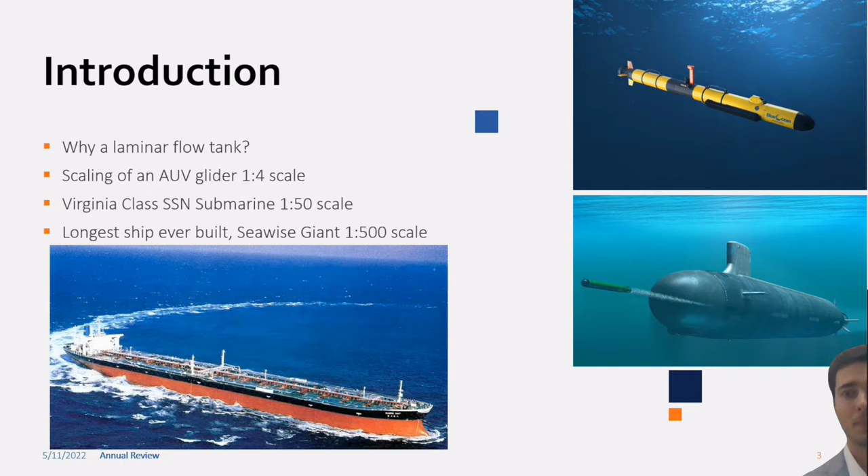So next we'll go over the calculations used, and some of the calculations I used were similitude, Reynolds number, entrance length, the flow rate, some head losses, and the power needed for the pump.

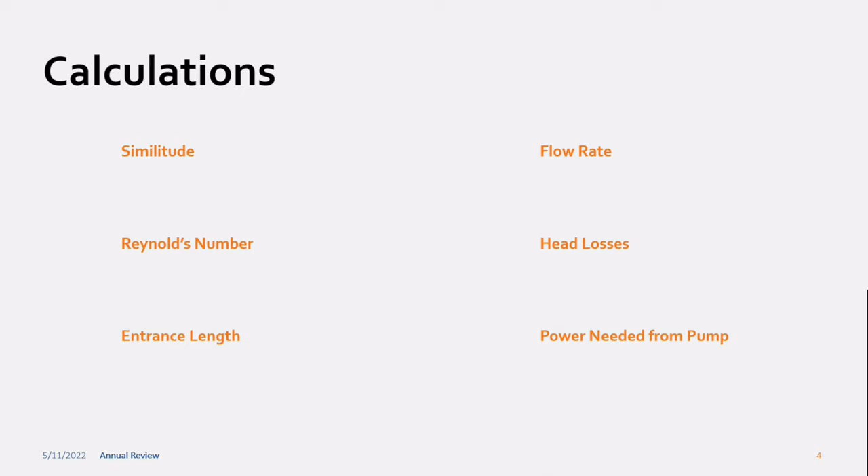So the first equation that I used was similitude, and a little background on similitude is the relationship between a prototype, which would be your real world object, and your model, which is your scaled object. So you can use similitude with dimensionless parameters, and these parameters can be things like Reynolds number, the Froude number, your drag coefficient.

In this example, I used Reynolds number, and Reynolds number was important to me because I was going to model an AUV glider, which is under the free surface, which Reynolds number is great for comparing. So in this case, I used a prototype velocity, which is the real world velocity of the AUV, at 1 meter per second and at a 1:4 scale factor. And it turns out that my velocity of the model is 0.25 meters per second. In other words, this is how fast my flow needs to be inside of my tank.

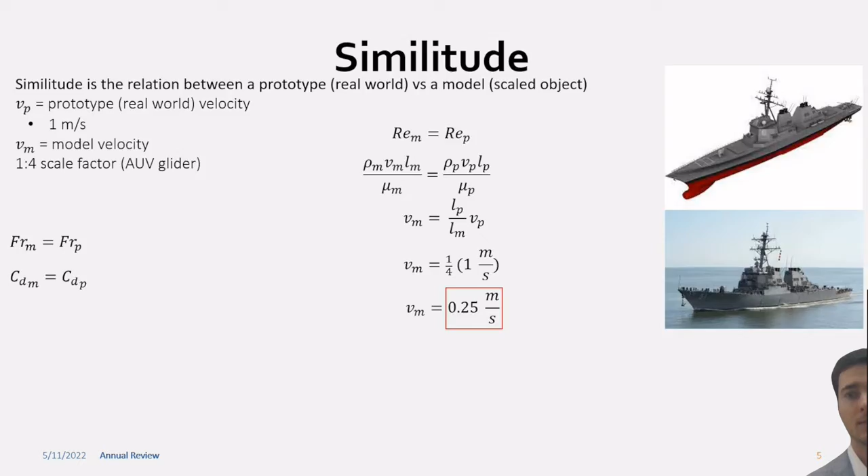The next calculation I used was Reynolds number. Reynolds number describes if your flow is laminar or if it's turbulent, or maybe it's in the middle in a transition region. So laminar flow is when flow is uniform in the same direction and velocity. The formula for Reynolds number would be rho VL over mu, where rho is your density, V is your velocity, L is your characteristic length, and mu is your kinematic viscosity.

Using this equation, I calculated that my Reynolds number inside of my laminarizer is 794, which, as you can see in the bottom left text here, is in the laminar regime of the flow, which is good for this tank.

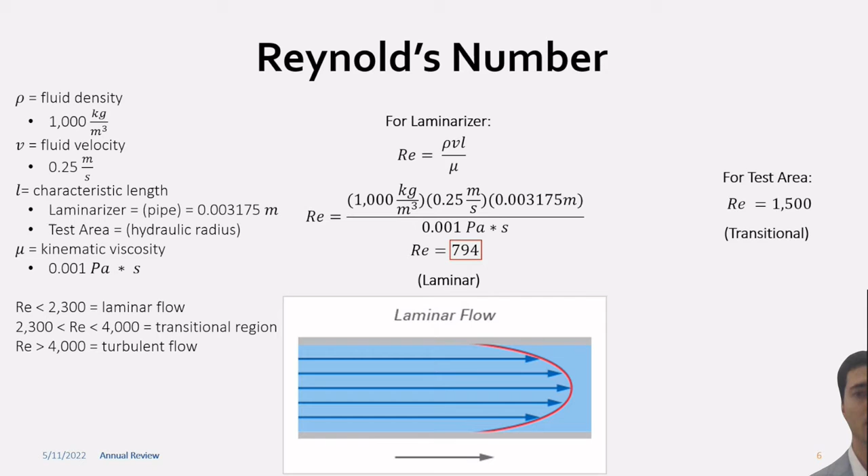Next, I calculated my flow rate, which I needed for my pump. And since I knew the cross-sectional area of my tank, which is 0.25 meters by 0.25 meters, I can get my area. And I also knew my velocity from the previous calculation of 0.25 meters per second. We use the formula Q equals AV, and I get a number of 0.015 meters cubed per second.

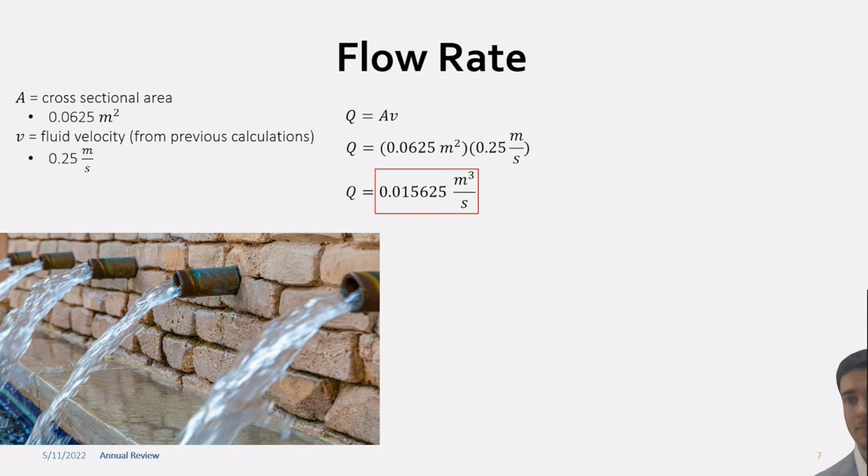Next, I would like to find the flow rate over my weir, which will be in the back of the tank. And you use the formula to calculate the flow rate over the weir, which is Q equals CLH to the 1.5 power, where C is your weir discharge coefficient, and that describes the shape of the crest of your weir. In this case, I used a sharp crested weir, and my coefficient is 0.29.

I also have the length of my weir, the height of flow over my weir, the upstream depth of flow, and the weir height. And I come out to a calculation where my flow rate over the weir is 0.0057 meters cubed per second.

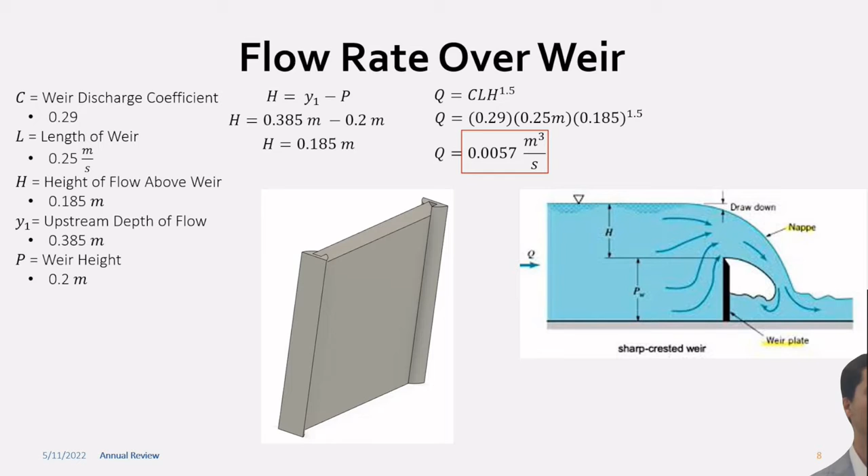Next, I would like to find how long does it take for my flow to become fully developed? In other words, how long does it take for my flow to become fully laminar? This happens inside of my laminarizer, which will be in the front of the tank. It is responsible for taking turbulent flow and transitioning it into laminar flow.

I use the entrance length formula, which is 0.05 times the Reynolds number times the diameter. And the diameter would be 0.003175. In other words, this is how small my pipes need to be inside of my laminarizer. And I get a number of 0.13 meters or 13 centimeters.

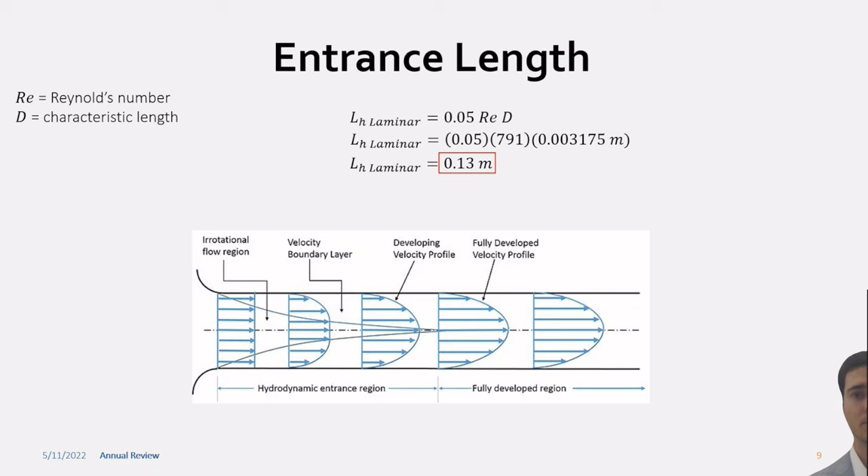So for the head loss inside of a pipe, you need your roughness coefficient, your length, your diameter, your flow velocity, and of course the gravitational acceleration. And the value I get is 0.00225 meters, which is good for this project.

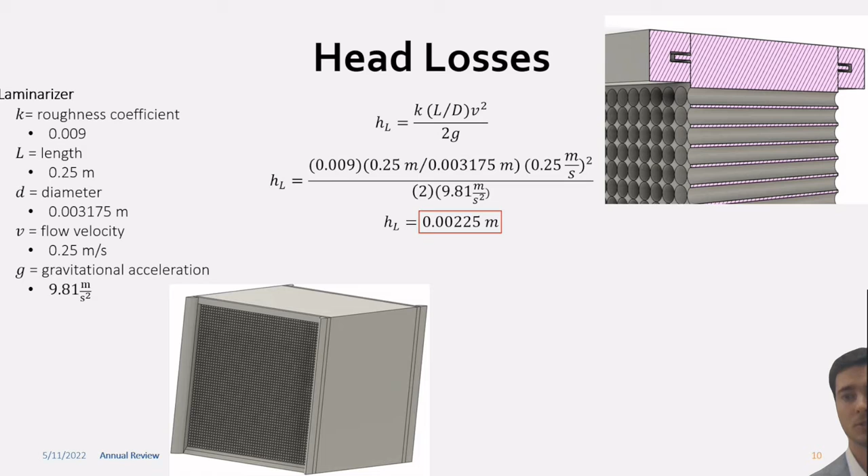The next head loss I calculated would be the head loss inside of the pipe coming from the pump, which is this right here. As you can see, the pipe connects to the pump, pumps it up to the front of the tank, and goes through the laminarizer over the weir and then recirculates again. And for this one, I got 0.0078 meters for this pipe.

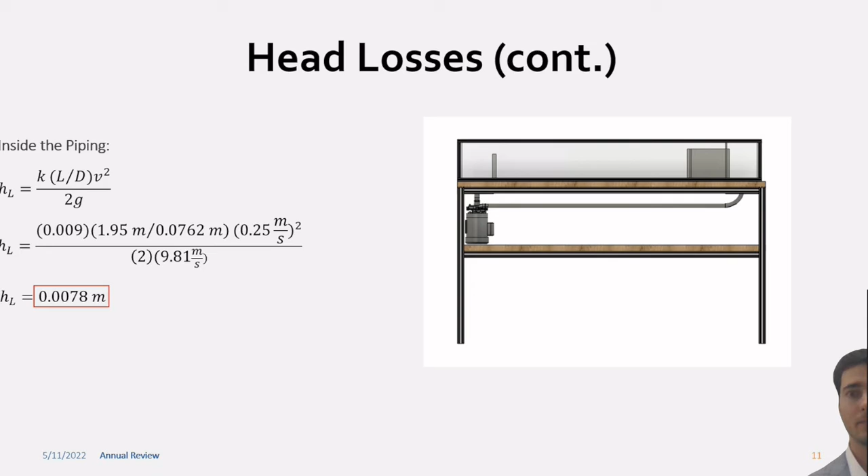Next, I wanted to calculate what my power needed for my pump would be. So I used the formula P is equal to gamma Q times HP, where gamma is your specific gravity or specific weight. Q is your flow rate, which was determined in previous calculations, and then your head of the pump. Or in other words, how high your pump needs to pump water. And I come up with a value of 54 watts, or approximately 0.7 horsepower, which is sufficient for the pump that I chose.

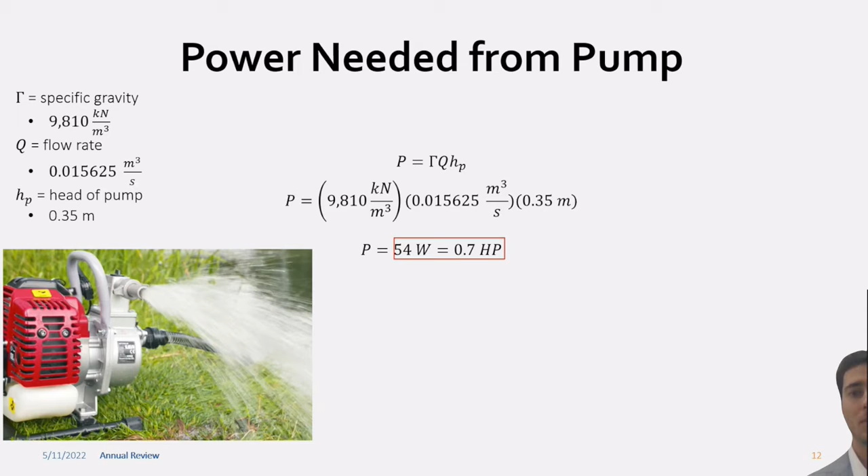Next thing I did was I used CFD, or computational fluid dynamics, specifically Autodesk CFD, and I used this to verify my fluid calculations and also to visualize my fluid flow. So in this top model here is a model of my tank, and I did this to see the flow rate over the weir through the tank. As you can see in the test section, there's a free surface of water, and the water nicely flows over the weir. This is also represented in this 2D model here.

You can kind of see the tiny pipes of the laminarizer here, and the water flows over the weir, and the blue is essentially void space, so the air. And this small bar down here is one of the pipes inside of the laminarizer. And you can kind of see how the flow fully develops inside of the pipe as it starts out very yellow in this regime and slowly transitions to a more red in the middle, which would signify that it is fully developed inside the pipe.

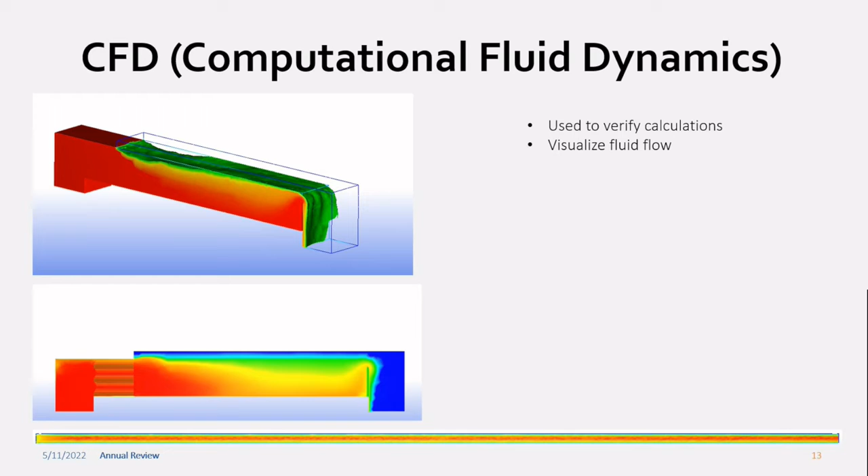Next up, we'll go over the design of the tank. The tank itself will be made of 3/8 inch acrylic, and this is good because it's clear and you'll be able to see what is going on inside of the tank. It'll be surrounded by an aluminum support structure to give it strength and rigidity.

Also, the laminarizer right here will be in the front, responsible for taking your flow from turbulent to laminar. And there will also be a weir in the back of the tank, which is also removable. So if you wanted to run a test without the weir, you could. If you wanted to change the shape of the weir, you could.

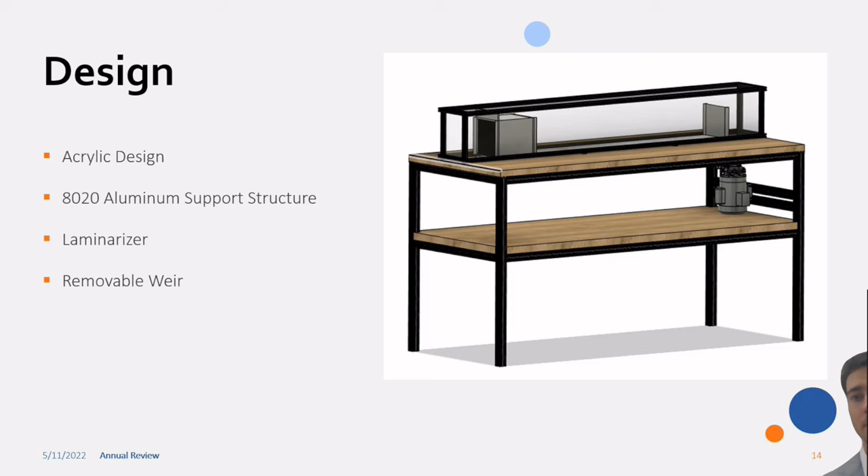So how will you actually visualize this flow? Well, we're going to use a process called electrolysis, and I will have a platinum wire and I'll pass current through it. And this creates a small stream of bubbles, essentially splitting H2O molecules into H2 and O, which is hydrogen and oxygen. And these bubbles follow the path lines of the fluid flow, and they're small enough to where they don't rise under their own buoyancy. So they will flow along your test object.

Now, also we'll use a laser sheet, and this laser sheet will be made of lasers that will spin in a circle, and they'll be spun fast enough to where it'll look like a sheet of lasers, and this will illuminate the bubbles as they flow around your object, as you can kind of see in this example right here.

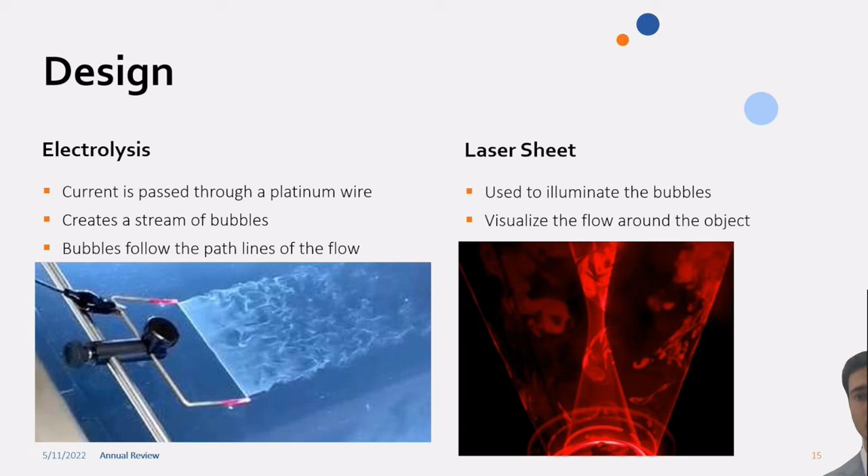So we'll go over the budget now. So for the tank itself, this is just the acrylic. We'll have a budget of $230, and the table, which will be made of these extruded aluminum profiles, will be the most expensive part of the budget at $1,225. The pump itself also includes this VFD, which is a variable frequency drive responsible for controlling the speed of the pump, at $1,160. The frame, which will also be made of these extruded aluminum profiles, this is the frame around the tank itself, will be $185.

And the laser sheet, which consists of lasers like this, will be $235. The electrolysis, which will house this platinum wire, will be around $100. And then miscellaneous parts such as silicone, glue, hardware has a budget of $80. And the approximate total is going to be $3,300. Of course, these prices are subject to change with the cost of building materials now.

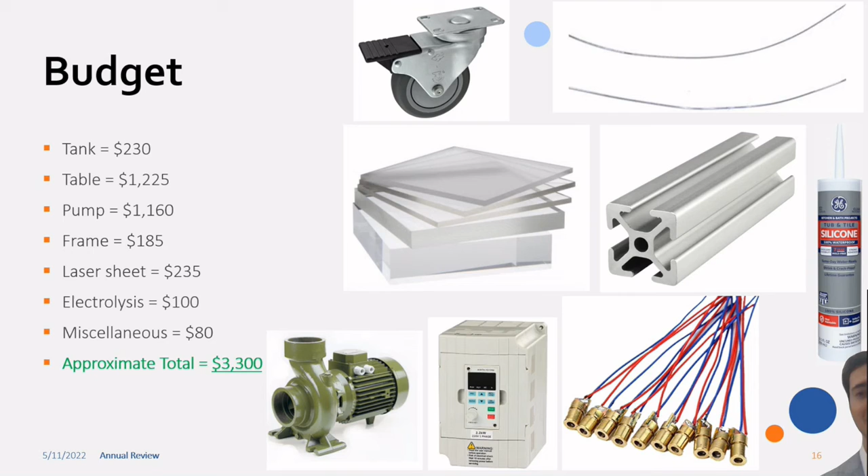So some lessons learned that I learned throughout this past year. Definitely needed to learn these new calculations that I needed to design this tank. I learned how to use Autodesk CFD, which was how I verified those calculations and visualized my fluid flow. I also got to use Autodesk Fusion 360, which I knew how to do beforehand, but it was nice to hone my skills on it again.

For soft skills, critical thinking was the one thing I used the most. I had wrong calculations sometimes, and I had to go back and find out why. And I had to correct those calculations and redo them many times. And so critical thinking was important.

Also, each week we gave a presentation on what we had done from the previous week in this class, and we had to get up in front of our class and present our findings. And also each week we were assigned new tasks to do in the project. So learning how to manage those tasks with other classes and work and just general life was definitely important.

The thing that surprised me the most was how long the research and design process actually takes. Going into this, I originally thought that it would take no more than a few months to design a simple tank. It turns out that designing a simple tank is not as simple as I thought it was. There's a lot of calculations I had to verify, a lot of calculations I had to redo. Research papers I had to read, see what other researchers had done in the past, and see what I could learn from them. So the R&D process takes longer than I thought it would.

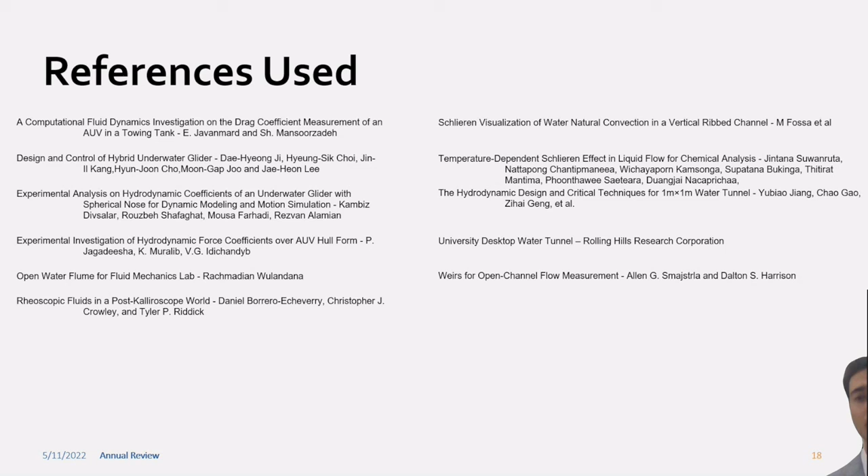So in conclusion, I learned from this project that it is feasible to build a laminar flow tank, and you can test models in it with a flow velocity of 0.25 meters a second while using electrolysis and a laser sheet to visualize the fluid flow. And to reiterate, these models can be something like a ship or a boat on the free surface. It can be maybe a fish or an ROV, or just a general object such as a sphere or cylinder. Or as long as it's moving at subsonic speeds, since my flow tank does not move at supersonic speeds, you could theoretically model Madi's favorite aircraft, an F-22 Raptor.